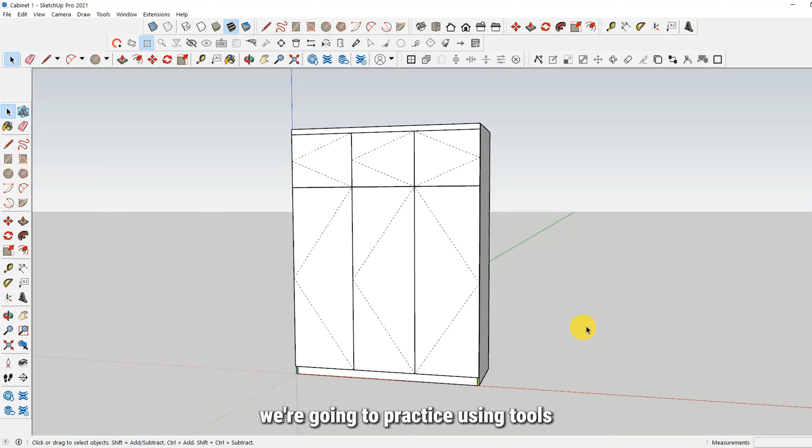Hi guys! In this video, we're going to practice using tools to adjust connectors. With one click, we can move or remove connectors. Besides, we can also reverse side of the connectors.

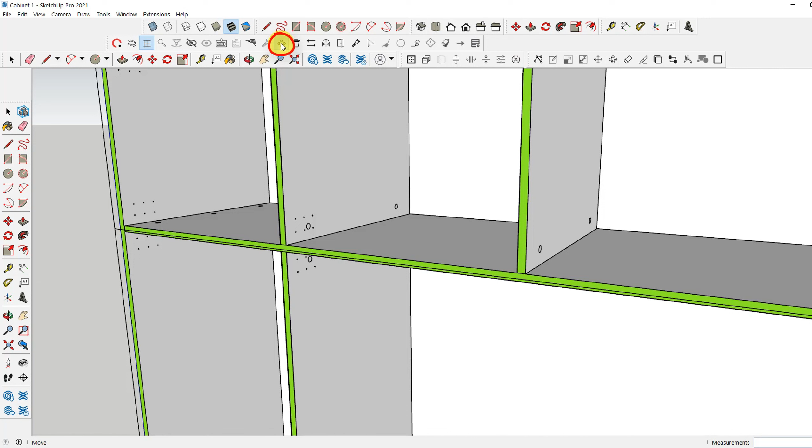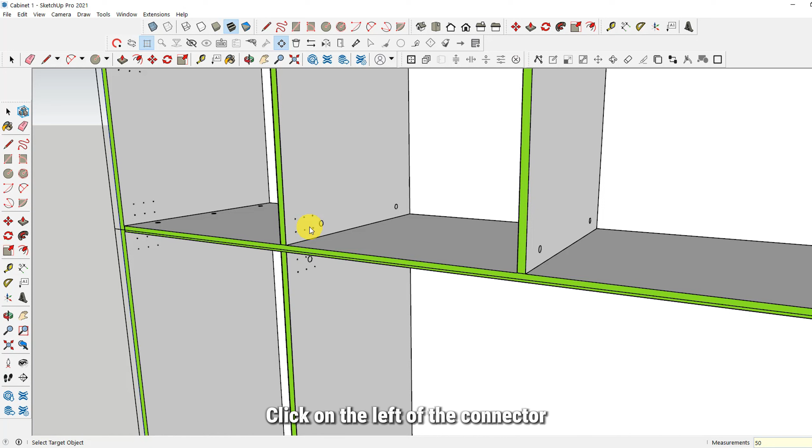First, to move a connector, select the tool, Move. To move the connector to the right, click on the right of the connector and type in the distance on the keyboard. For example, 50 millimeters. Then hit Enter key, and click on the left of the connector so that it moves to the left.

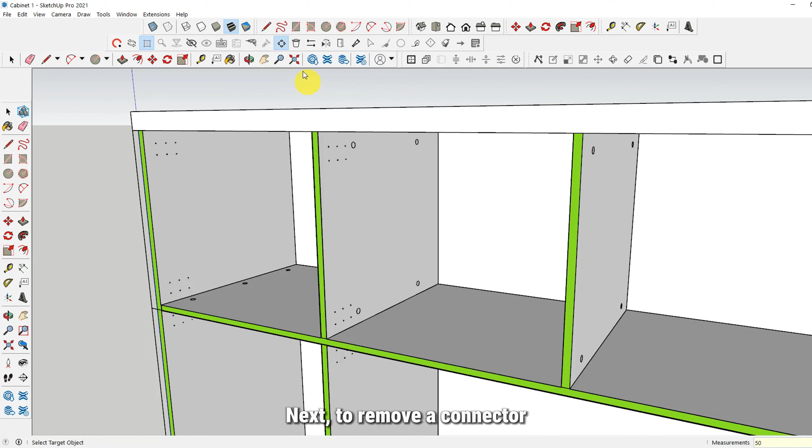Next, to remove a connector, select the tool, Remove tool. First click near the connector, then some yellow dots show up. Second click, it will be removed. Again, first click and then second click.

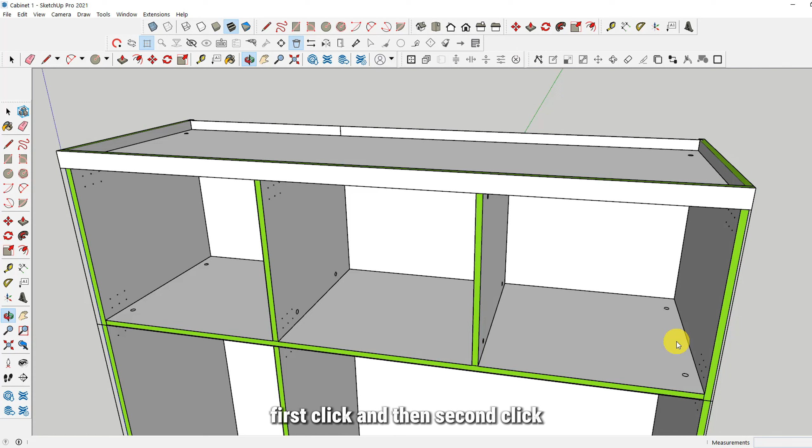Next, to reverse a connector to the other side, select the tool, Reverse side. Click near the connector and then click again. It will be reversed.

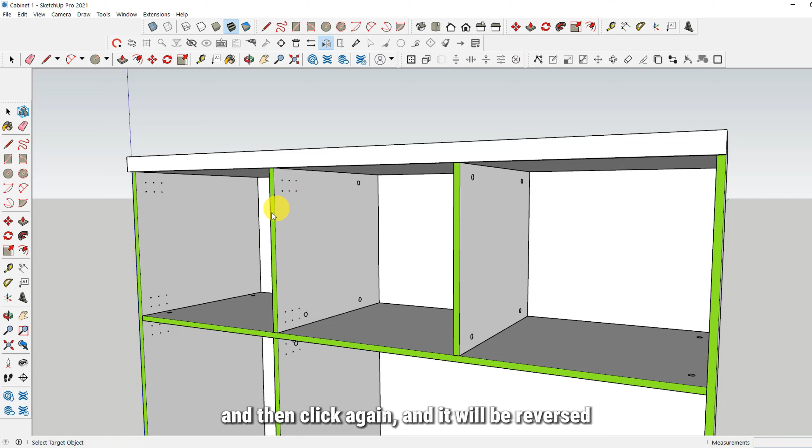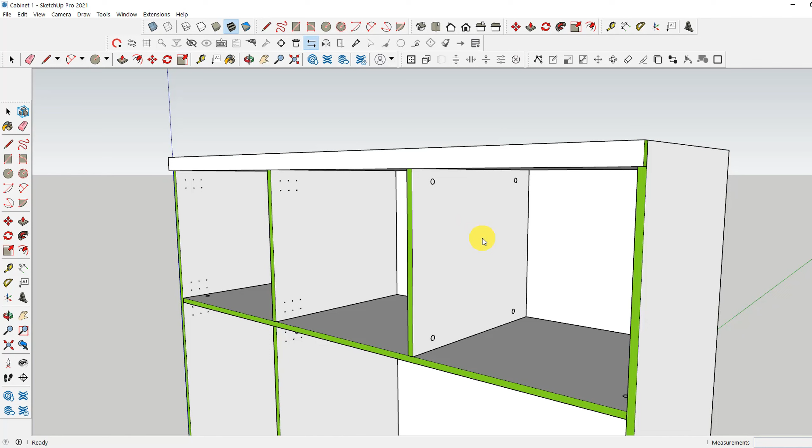Moreover, we can also reverse side of all the connectors on one side to another. Select the tool, Reverse side all. Then click on the face with the connectors. With just one click, all the connectors will be reversed to the other side.

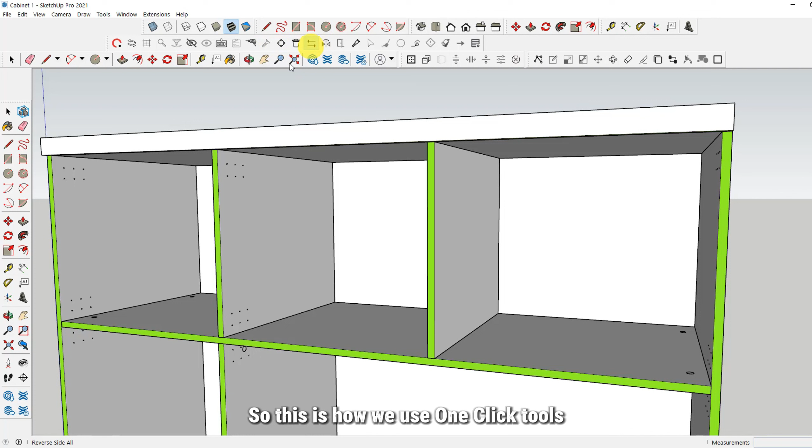So this is how we use one-click tools to adjust connectors. For other tool instructions, see you in the next videos.